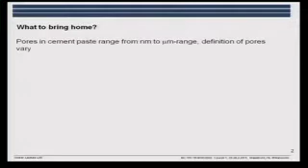So let's start. What to bring home? You won't forget this, will you? That we have this variation in porosity and the definitions vary. That the pore structure of cement paste is affected by drying and heating if we treat it. So conditioning, preparing your samples before you actually look at the pore structure may alter the pore structure, and that has to be considered.

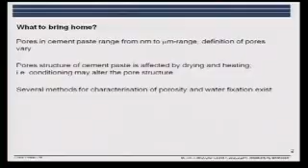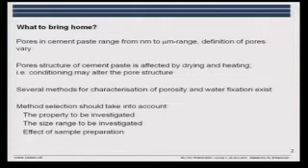Several methods of characterization of porosity and water fixation exist, and when you select the method, you should consider the property you want to investigate. What is it you need information on? Is it total porosity? Is it porosity in a given size range? Or is it the behavior of the water? What are you going to use this data for? The size range you want to investigate, and possible effect of sample preparation.

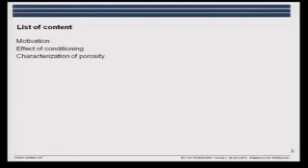So let's start with the motivation and effect of conditioning. I'll start with that because it will give some background in comments to the methods. Then characterization of porosity, the summary, and the references.

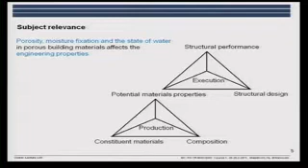So, motivation. As before, we are interested in information on understanding of porosity, moisture fixation, and the state of water in materials, because it has an impact on engineering properties—both the porosity, the strength, and the durability. And when we're talking about moisture fixation and the state of water, it's the creep and shrinkage, volume stability of the material, and transport of substances, durability issues.

Most of the durability or deterioration mechanisms are linked to water. If we have a low amount of water, a low relative humidity in the material, the degradation processes will take place at a very low rate or not at all. So it's relevant. And please remember, when you're talking about materials, they are to be used in a structure, and it's the performance in the structure which is the final consideration of the user.

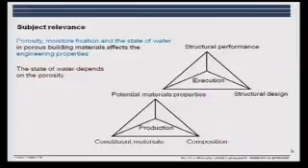And the state of water depends on the porosity. When we're talking about cementitious materials—concrete, mortar, or cement paste—we have to consider the range we're looking at. Concrete is a composite material at different levels also.

We have the centimeter scale. Here we have split cylinders of concrete, hydrated either very young, where we see that the fracture has taken place in the paste—you can nearly see no aggregates here—or 3 days old, where we see that the paste has become stronger and we have fracture in the aggregates too. You see the red and black and white aggregates here.

Then we could also look at the concrete at a different scale, the millimeter scale, and this is what, for instance, we see in fluorescent or impregnated thin sections, which can be quite useful to get an overview of the structure.

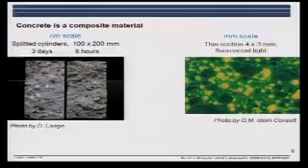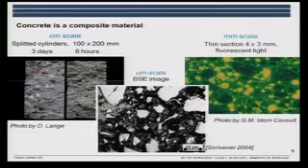And finally, we could go deeper into the structure and look at the microstructure, for instance with a scanning electron microscope. We could also use a transmission electron microscope, where we can get at the nano level—that's what you saw in some of the micrographs which Karen Scrivener showed on Monday. Again, remember when you read the literature that the definitions vary.

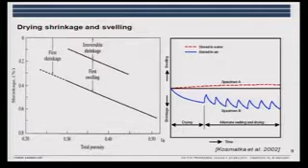Then if we wet the sample, we will have swelling and expansion of the material. But we also see that there is some volume change which is not recovered—some irreversible shrinkage. There seems to be a change in the structure of the material. And if you look here, another graph shows the shrinkage downwards and the swelling, the increase in volume, as a function of time.

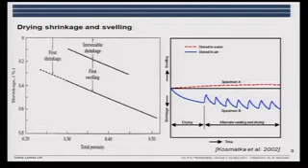Then we have some samples which have been exposed differently. We have here the blue one: drying, then exposed to wetting, drying, wetting, and you get these volume changes. Or if you store the sample in water, you actually have a swelling. That has an impact on the overall porosity, and we can see that something is changing in the pore structure, in the material.

Well, I know I'll show you these graphs before presenting the methods, but let's make a brief introduction. This is mercury intrusion porosimetry.

You have a sample which you have dried one way or the other, and then you press in mercury at increasing pressure. Assuming a given shape of the porosity, you can link a given pressure and the amount of intruded mercury to a relation between intruded volume and pore size. And this is the pore diameter we see here.

Note that it's the smallest diameter here. They start to press in mercury at low pressure, and at a certain point some mercury will enter the pore structure. What we see is that depending on how the material is dried, we get different curves.

Freeze drying, vacuum drying, drying in oven at 60 degrees, and drying in oven at 105. Depending on the material—here we have CEM I, and here CEM V, two different types of cement—the method of drying has a different relative impact on the measured porosity.

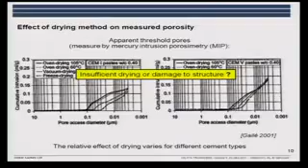Is it insufficient drying, or do we actually damage the structure? It could be that we have chunks or stoppers of liquid still in the structure which limits the ingress. But it could also be that we have damaged the structure.

This is another technique: low temperature calorimetry, where you have a saturated sample and subject it to cooling. At a certain point there will be ice formation in the sample, and you measure the heat development due to ice formation. The smaller the pores, the lower the temperature at which you see this heat development, so this is an indication of the pore structure.

How it's described is that when you start, the freezing front will start from the outside and move inwards. So if you have very fine pores on the outside, the freezing front has to penetrate these—it will take some time. Behind it could be that you have larger pores. So the freezing curve is a picture of the bottlenecks or threshold pore sizes.

Similar to mercury intrusion, where we have to press the mercury in, the first pore size where we have ingress is the threshold, the bottleneck. For instance, if I have to freeze from here, I have to go through this small one before I can enter the larger one behind—threshold pore sizes. So this is what we see.

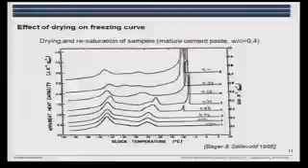You can see the lower the relative humidity the sample has been dried out to before resaturation, the larger the peak, indicating that something is happening—we're destroying the structure. So the size of the percolated, interconnected pores increases after drying and resaturation.

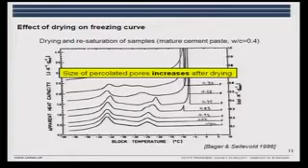Yes, can one associate a pore size scale with the temperature scale?

Yes, you have the Gibbs-Thomson equation where you can translate, making some assumptions again, the temperature to a pore size. And that's done.

With the Gibbs-Thomson equation, at high temperatures small changes in temperature have a huge impact on the predicted or calculated pore size, whereas at lower temperatures it's more robust.

So this was drying. It could also dry by heating the sample. You can see here that if we heat the sample, some of the phases in the system start to decompose, such as the gypsum.

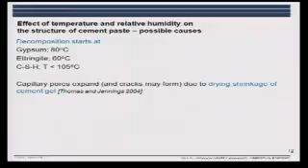For instance, if we were drying at 105 degrees, which we saw was used for the data giving the background for Powers' model, we can see that gypsum and ettringite start to decompose, and also the CSH. In addition, we may have some crack formation.

Another thing you have to consider is carbonation, where carbon dioxide from the air reacts with the calcium from the system. It could be from the calcium hydroxide, it could be from the CSH. Here you see the impact of storage on the measured surface with nitrogen adsorption, and there's a coarsening of the structure.

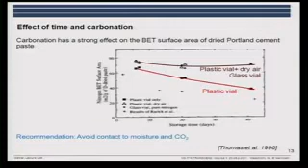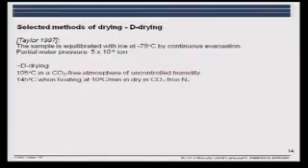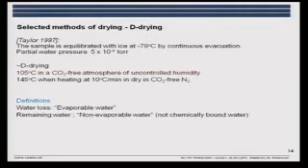Again here, we're talking about the water loss. It's defined as the evaporable water, and the remaining water is the non-evaporable water. As you saw before, it's not identical to the chemically bound water.

I'll mention a method which has been used increasingly, in connection with the recent Mercury project and also the core projects, where we have liquid exchange with isopropanol or isopropyl alcohol. The method can be used both to stop hydration, which you may want, and to dry the sample. You can stop hydration relatively rapidly, but if the sample is younger than 1 day, you should use another method, freeze drying.

So the sample is cut into thin slices, 5 millimeters or less, and placed in alcohol. You need an amount of alcohol 50 times more than the water in the pores. After some days, you take the sample and evacuate the alcohol, then store it. Of course, when storing your sample, you need a CO2-free atmosphere. The advantage is that it limits the development of microcracks, since drying with alcohol sets up less stress and creates fewer cracks.

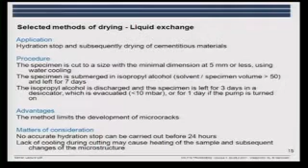Any questions? No, okay, so we start on characterization of pore structure. If we have these two samples, how do I describe the differences between them? What would you say? What would you describe? Which properties?

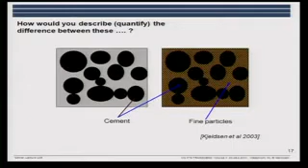Or what would you like to describe? Total porosity? Maybe surface area of the solids? Pore size? Could also be topology.

If we talk about porosity, there's total porosity. Often we look at the moisture-filled porosity at a given humidity, for instance if we want to determine the sorption isotherms. We could also be interested in the connected porosity or percolated porosity, especially relevant when talking about ingress. The surface area describes the amount of water adsorbed on the surface, and it's also an indirect way of describing the fineness of the pores. The pore size distribution could be relevant, and then the tortuosity and the pore shape.

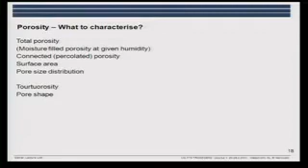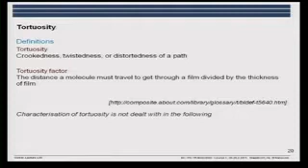The tortuosity is defined as the twistedness or distortion of the path. We have this tortuosity factor, which is the distance a molecule will have to travel to get through the sample, divided by the thickness of the sample. I don't deal with that anymore, but you need to know the term.

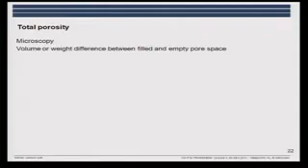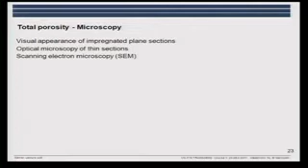So the total porosity, let's have a look at that. We can use microscopy, and we can use volume or weight differences between filled and empty pores. If we use microscopy, we can look at different levels: visual appearance of impregnated plane sections, large sections, optical microscopy of thin sections, and then scanning electron microscopy, and we can even go further down.

I find it very useful to start at the meso or macro level, because you can end up looking at a very small place which is not representative and where you don't capture these macroscopic effects. So depending on what information you actually need, you should also look at the entire sample.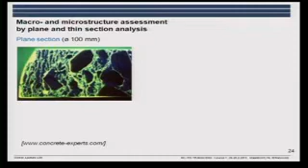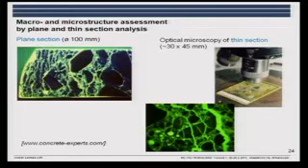With this fluorescent technique, using UV light, you can see the cracks coming up easily. It's the same technique with the impregnated samples we use for thin sections, but here they are very thin, and we can look through them. If you are to compare with standards, it's important that they have a given thickness, and this is 20 microns, which is typically used.

I told you earlier that the thin section technique could be used for estimating the capillary porosity. Here you see some reference samples prepared by a Danish company, showing the relationship between the green intensity and the water cement ratio: 0.3, 0.4, 0.5, 0.6. It's a fairly good technique, and if you're trained at comparing samples, and if the samples are homogeneous, you can do it with an accuracy of 0.02 or so.

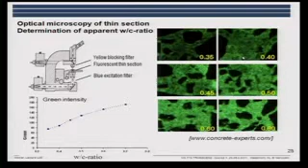But of course, when you're doing this, it's apparent capillary porosity, because the samples have to be cured in a similar manner, both temperature and time-wise. If you cure your sample for a longer time, you will have an apparent lower capillary porosity.

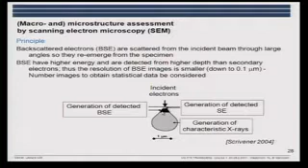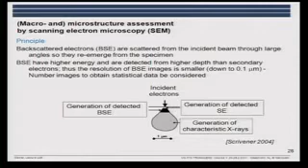Then we can use the scanning electron microscope. For porosity detection, we use the backscattered electrons, and as you saw similar to on Monday, they are detected from the upper layer, not the same volume as where we detect X-ray from. So here we have the sample, and this would be the area or volume where we can detect backscattered electrons from - a little less than half a micron in width.

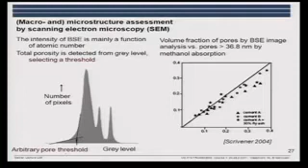The way it's done is we look at this first, where we have the gray level. In the bright area it will be the brightest materials, where we have the highest atomic number, and here we will have the porosity. So this will be the anhydrous, this will be typically the CSH, and then gradually the pores come. Usually there's a threshold for the pores set by using the tangents for the two lines here.

Let's see if I can show you - that one from the CSH and this one from the pore.

Here you have a graph showing the comparison of volume fractions determined by backscattered electron or scanning electron microscopy and image analysis, and then methanol absorption. And that compares quite well.

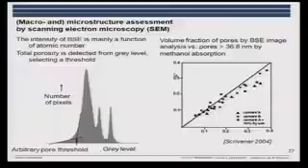So the advantages of this method: it's direct, and it's reproducible contrast from well-polished samples. Of course, you need to be sure that you're actually impregnating the porosity, and the samples need to be well-polished. Matters of consideration: how do you actually determine the threshold, the gray level?

And coming to pore size distribution, you cannot determine it from 2D images. You have the impact of the sample preparation, and then you need a lot of samples or images to have a reasonable accuracy of your data.

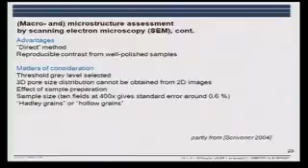Finally, depending on which type of porosity you want to detect or measure, you could have the problem with the Hadley grains, because you also detect them as porosity. Here we have the definition of the Hadley grains, and we've already talked about those, so I'll skip that.

Then the total porosity, the space filling - that would be the variation in volume, either because you press a volume in and measure the volume change, or the amount of material going into your sample, or you measure a weight change.

The material ingressing into your sample, or entering the sample, will depend on the size of the molecules. If you use water, helium, or nitrogen, they have different sizes, and they also have, if they are hydrophilic or hydrophobic, a different interaction with the material.

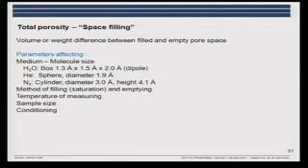Then the method you use to fill the sample - the method of saturation - and I'll come back to that in the next slide, and the method you use for emptying the sample will have an impact. The temperature you measure at, the sample size, are you actually able to penetrate the full sample? And again, how have you conditioned your sample before you start this test?

For the nitrogen, you have to have the water out before the nitrogen can enter, and also for the helium. So you have to dry your samples in a way.

The graph, I'll take that first - illustration here is for bentonite, that's why we have this huge amount of water and a desorption isotherm quite different from what you usually see. We used bentonite intermixed with cement to decrease the clinker factor in some samples, so when we were mixing the bentonite in, we needed to know how much water would be absorbed in the bentonite and when it would be released during hydration, for instance. That's why we did this.

But it illustrates that if we just have adsorption and capillary condensation, we are able to fill the sample according to the black curve, whereas if we apply suction and pressure, we can actually fill more of the pores, the larger pores. But we do not have condensation in the larger pores, so therefore we need another technique.

So the method you saturate your sample with, do you have capillary suction? Or do you actually use vacuum saturation, which is used in many of the standards? Or do you pressure saturation, where you will pressure the whole lot?

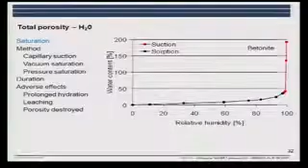The duration, if you're using capillary suction, has an impact on the amount of water ingressing, especially if you have low water cement ratio or dense materials. And then you could have some problems as prolonged hydration. When the water is entering, if the sample is not fully hydrated, it will keep on hydrating. So you're changing your microstructure during the conditioning.

Leaching is that you have dissolution of part of the solids in the material, and the ions are then going into the water. If you have a small sample, large amount of water, you can have leaching, especially of the alkalis. And that will change the material again.

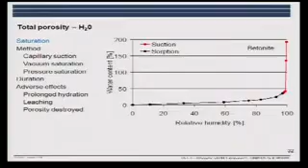And then if you use a large pressure, you can have part of the porosity destroyed, and you end up with something which is different from what you wanted to look at.

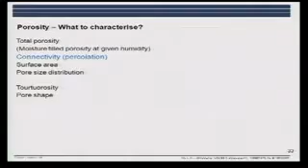So, the next issue, connectivity. Excuse me. Yeah, could you use this one? Yeah.

isotropic, an isotropic structure, that it's similar in all directions.

But you need to assume that to be able to calculate the 3D pore distribution. And do you usually do that? I mean, is it acceptable as a hypothesis? It's done. So as long as you state your assumptions, yes.

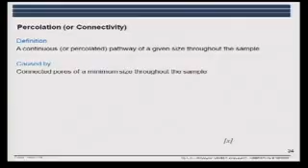So, percolation. Well, a continuous, that's the definition, that you have a continuous or percolated pathway of a given size throughout the sample. And it's caused by connected pores of a minimum size throughout the sample.

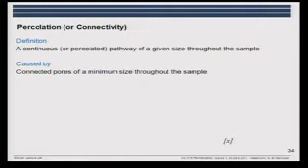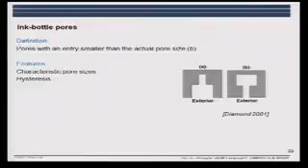And then in connection with that, it's also relevant to look at the ink bottle pores, where example B is the ink bottle pores, where we have from the exterior a smaller pore size, and then it's going into a bigger pore size. Such ink bottle pores cause these characteristic pore sizes, or they are the characteristic pore sizes, and then they cause hysteresis.

Difference in the behavior when drying and wetting.

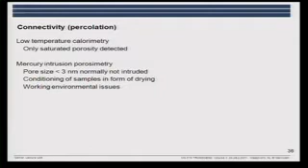The methods we can use to determine the connectivity is the low temperature calorimetry. And here we have to consider that it's only the saturated porosity which is detected. It's the freezing of the water, if there's no water in the pores, nothing to detect.

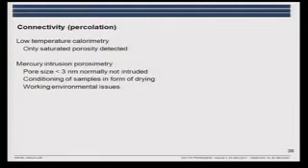And then mercury intrusion porosimetry, and there's a lower pore size, typically 3 nanometer, but that depends on the pressure you're using. And we have to consider the conditioning of the samples in form of drying, and then there are working environmental issues. I know that several have taken down their instruments because of these issues with mercury.

The low temperature calorimetry is not that much used, but as it can be used on virgin samples, not dried samples, it has a potential which we want to look more into, and it will be used in connection with the project we're looking at.

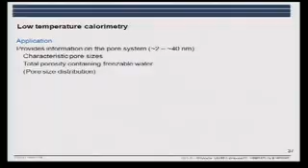It provides information on characteristic pore sizes, and if the pore sizes are large, you have a difficulty determining the pore size. So typically it would be in the 2 to 40 nanometer range.

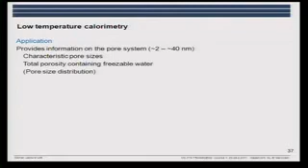The total porosity containing freezable water we'll have information on, and from the heating curve we can obtain pore size distribution, and again that would be the part of the porosity where we have freezable water.

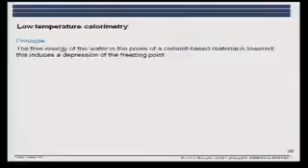The principle is that the free energy of the water in the pores is lowered due to the size of the pores, and that induces a freezing point depression.

We also have a freezing point depression due to ions in the pore solution, but it's less than what we see due to the pores.

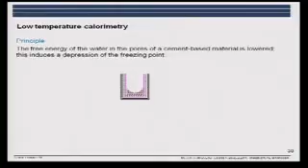Here we have a pore. We may not draw it like that, but here we have a pore, and this part is the pore wall. Here we have the adsorbed water, and here we have the condensated water.

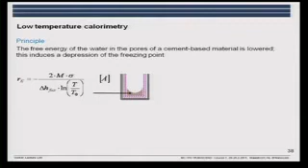The condensated water, the size of the meniscus, we can obtain from this Gibbs-Thomson equation, and here you have all the parameters, where we have the radius of the meniscus, the molecular mass, the surface energy, and the heat of fusion, and the temperature difference.

The freezing point in bulk there, and the actual freezing point which we are measuring. And the layer, the thickness of the layer, that's a function of the temperature.

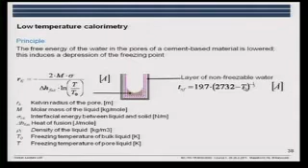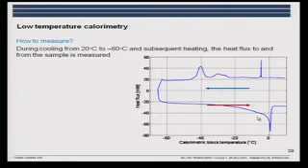So how do we measure? We place a sample in a calorimeter, and then the temperature is gradually lowered. We have a cooling, and we measure the heat flux. And at a certain temperature, the heating takes place, and we have a thawing of possible frozen water.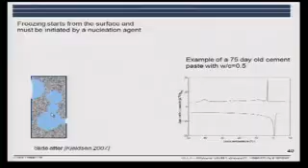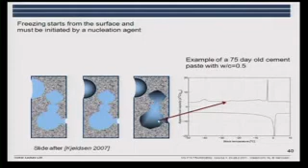If we look at a sample here where we have pores, this is the water, and we have some freezing taking place from the exterior, and we see the first peak. At a lower temperature, the next part of the pore water will start to freeze, and finally the smallest pores are freezing. Then part of the pore water, which is not illustrated here, but if we have porosity here, it will not freeze at these temperatures.

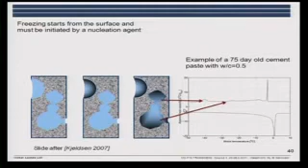Here you see an example of some materials where you have reference - it's mortars, just an ordinary Portland cement mortar, where you can see the change in freezing curves of samples cured for 1 day, 7 days, and 75 days.

When you look at this, you can see that at 1 day we have very little of the fine pored material, but it's increasing with time, whereas initially we have a lot of water freezing at high temperature, whereas at 75 days nearly none. So we have got finer porosity and maybe many threshold pores.

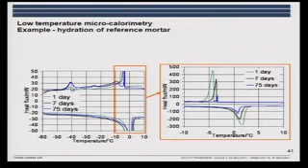When you're looking at the thawing curve, you can see it is development of threshold pore sizes, because there's such a difference between the cooling and the thawing curve. So this is what I said - we have a refinement of the pore structure.

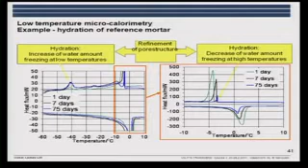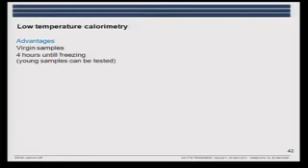The advantages of this method are that we can use virgin sample, non-dried samples. It doesn't take that long to freeze, so the samples can be fairly young - it takes 4 hours or so until they freeze. But of course it depends on your cooling rate. We at DTU are using samples the size of my thumb, very large. Others are using much smaller samples, and they can have a more rapid cooling.

There are several matters of consideration. When determining the heat flux, there might be a difference in temperature between the thermopile, where you're measuring the temperature, and the sample. And if you have a lot of water which is freezing and the temperature is decreasing at a given rate, well, there will be a temperature lag.

Then in freezing, you may have supercooling of your water or the pore liquid, and often a nucleation agent is used to ensure that you don't have that much supercooling. There might be migration of water from the interior of the sample out to the surface, so freeze drying.

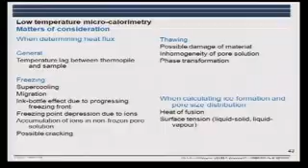We have to consider the ink bottle effect, which is not considered in all literature if you go back. We have the freezing point depression due to the ions, and when the freezing takes place, you have a brine being made - so the water is freezing, but the ions are being left in a part of the solution which is getting more and more concentrated. So we have this accumulation of ions in non-frozen pore solution, and then there might be possible cracking.

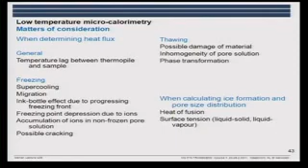So you see, it's not perfect. Then in thawing, possible damage of the material, inhomogeneity of the pore solution which we get, and we have the phase change transformation. Then when we are calculating the ice formation, there's a discussion of which value of the heat of fusion to use and which value of the surface tension to use. That also has an impact on the calculated pore sizes.

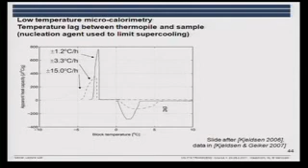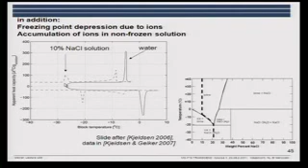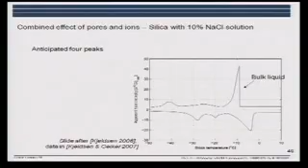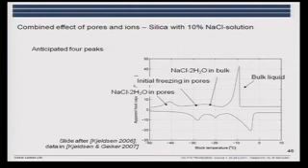If then we have a system where we have pores and ions, we have the bulk liquid freezing, we have the sodium chloride in the bulk, and we have initial freezing in the pores, and we have the salt in the pores. And then you can imagine - this is just one pore size. Then we have the system, our cementitious material, where we have a variation in pore sizes, and we have several different ions in solution, and the concentration changes. And we don't have a phase diagram for the pore liquid.